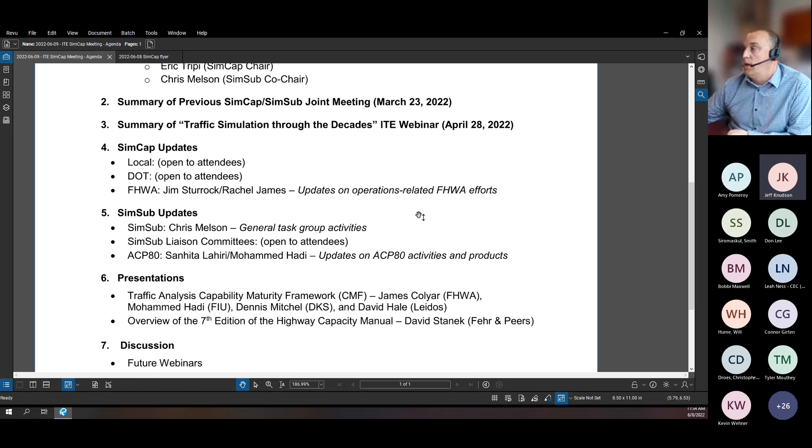So from a national SimCap meeting perspective, there is the meeting tomorrow from 2 to 3:30 Eastern time, so that would be 1 to 2:30 local time here in the central. Lots of good information on these national meetings. These SimCap meetings have been joint Sim Sub meetings, and lots of great information shared. Eric Tripi is the SimCap chair, and Chris Melson is the Sim Sub co-chair with John Shaw. Some of you may recognize that name, but FHWA has provided a lot of great updates on projects they've been working on, and there's been a lot of good presentations shared. So if you have the time and availability, there is a link here, a PDF and a Teams link, and I'll try to post that in the chat.

This is again tomorrow from 1 to 2:30 Central Time. The next meeting is planned to be in person as part of the annual ITE meeting in New Orleans. It's scheduled right now for 2 o'clock Central Time on Monday, August 1st, and they are going to look into seeing if they can make a call-in available for that, so more information to come. Any questions on the national stuff? Any other input that others may have?

Then I'll turn it to Rebecca for any DOT updates. Yeah, thanks Rob. I have two small updates. The first one is that the new Highway Capacity Manual came out earlier this year, so if you have any projects that you want to start using the new Highway Capacity Manual methodologies, you can. We'll accept those. You can continue to use the previous version through the end of the year, but if you have any projects that start after January 1st, 2023, we're going to require using the new Highway Capacity Manual methodologies. Now, I know there's always transition with projects, so the best advice is to contact your local region traffic engineer to make sure that's the right method you should be using. If you have any questions, you can always reach out to BTO and Vicki Haskell.

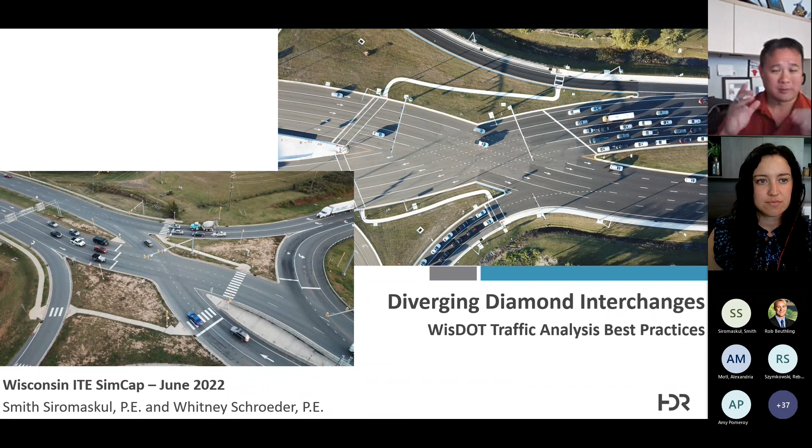We are going to talk specifically about VISSIM, primarily because that was what we were scoped to do, and that's how the document was written. But that also means that we're going to get into the weeds on some things. So if you have any questions, pound away on the chat window, I will get to them when I can.

Basically, what I want to start with is just my resume, or HDR's resume, in terms of DDIs. I have about 20 that I've worked on personally that are now open to traffic, and we've worked on them coast to coast. We've worked on them across the planet, actually.

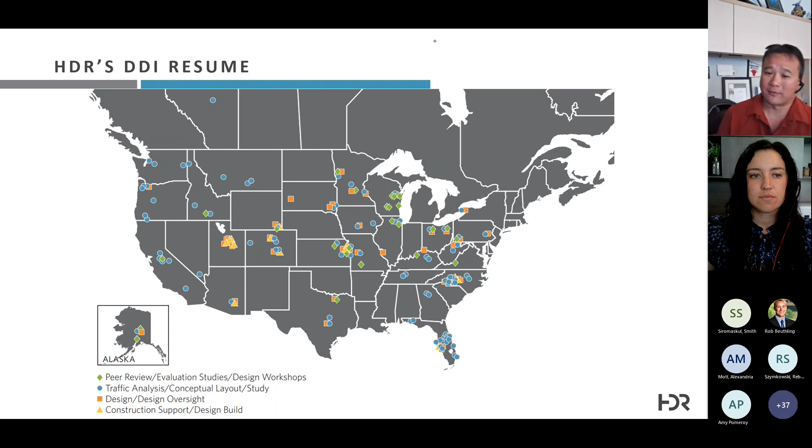A couple of the ones in Australia that are underway, under construction - one is open, one is about to break ground. But the gist of it is we've seen a lot of DDIs in a lot of different places, and we've done a lot of the different kinds of analysis that you'll see on diverging diamond interchanges in different contexts and different areas.

So this is what I want to talk about today. I want to talk briefly about software selection, about how to do a rough rule of thumb in terms of developing lane configurations, because it is pretty straightforward to look at a set of volume diagrams and just go, this is where I think I should start. And I'll walk you through a little bit of that.

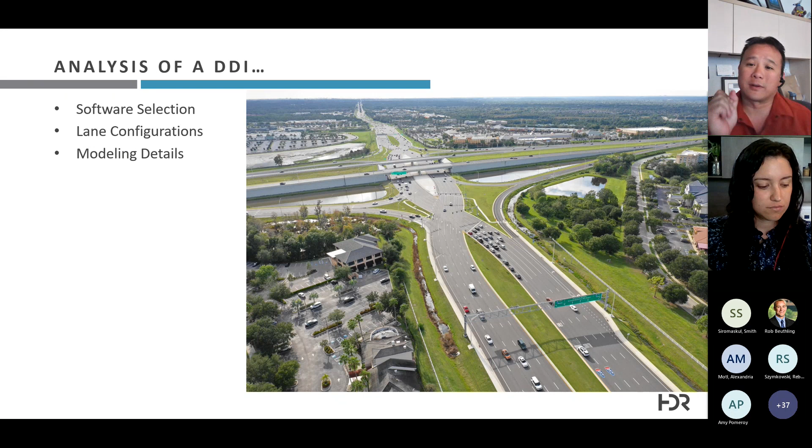And then we're going to get hardcore into modeling details. This will involve, you're going to need quite a bit of familiarity with some of the VISSIM details in order to get the most out of the back end of this presentation. So let's start with software.

In terms of HCM, HCS, it's yes, the DDI is included. No, you can't actually take a look at progression. No, you can't really look at cycles or developing signal timings. There are a whole host of things that make it somewhat impractical to really do a decent analysis of a DDI in HCM, to be completely honest. If you're finding one that is in the middle of an isolated space with nothing around it, that's one thing.

But take, for example, what you see on the screen right here. This is the I-25 DDI in Cheyenne, Wyoming, just south of I-80. It's a very small one, but the gist of it is, if you look at it, there's a lot of access points that are immediately adjacent to the interchange.

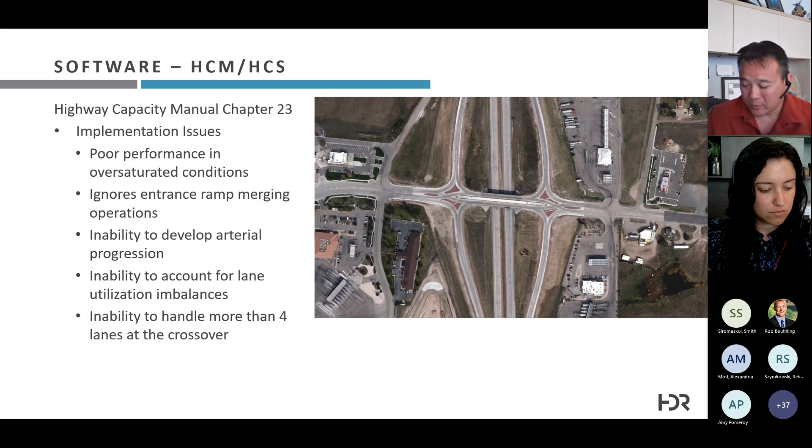With almost any DDI I can think of, there are going to be complications that make it such that even at a fatal flaw level, you really don't want to be relying on HCM in order to do your analysis. Now, I've seen a lot of analyses or studies that have used Synchro to justify looking at a DDI or considering a DDI. Here are a couple of major things that present issues for Synchro.

What you see on the screen is one of the first DDIs that we put in the state of North Carolina, I think. This is just north of Charlotte, in the town of Concord, North Carolina. There are two that we put in on this design build that are side by side, one at Poplar Tent Road, the other one at NC 73. This one that you see here on the screen used to have a full-blown three-legged intersection right here.

What you'll notice about this is we converted that into basically a three-legged R-cut. So it allows the left turn in, but everybody coming out of that road needs to go down to the west, U-turn, and come back around.

What this means, though, is that you have a whole bunch of different elements that require advance notice, so to speak. For example, if you're coming down this ramp, you're going to position yourself in a different place on that triple right turn, depending on whether or not you're trying to make this hook to go north or whether or not you're trying to go through.

In synchro, you don't have the ability to give vehicles brains. Basically, what you do in synchro carries over to sim traffic, but in both, the gist of it is a car only sees the next decision. That's it, whatever decision is in front of it. It has no ability to pre-plan for the decision after the one it's about to take.

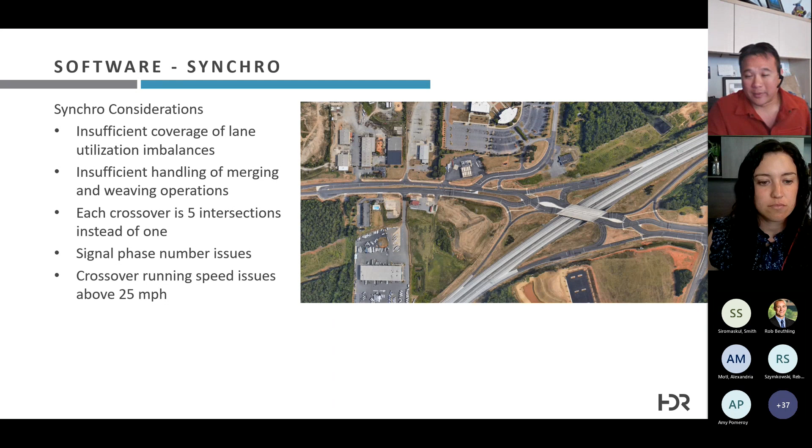Another issue is if this is in a corridor, synchro really doesn't like the fact that phases 2 and 6 cannot run together when you're in a DDI. What that means is you basically blow out your time-space diagram. It doesn't work terribly well.

And here's something that's buried in there. If you're planning on taking the synchro file and converting it into sim traffic, yes, you can code a DDI to sort of look like one, but at the end of the day, one of the two crossover maneuvers is treated as if it's a diagonal turn. Because it's not a through movement and it's treated as a diagonal turn, you can't put in a running speed higher than 25 miles per hour.

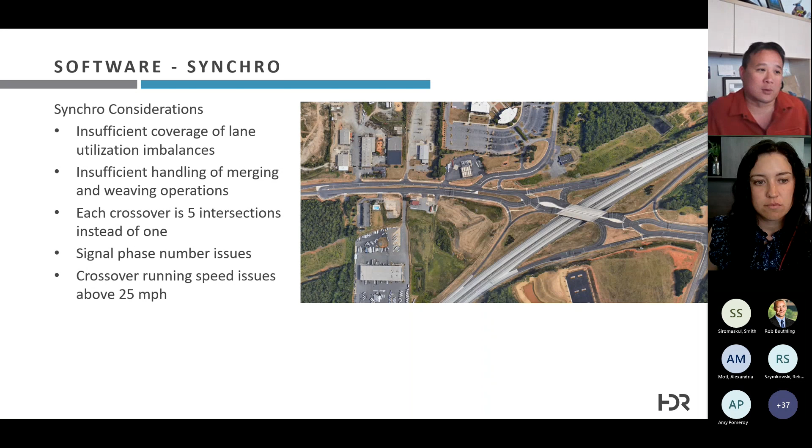That doesn't matter on an interchange like the one you see here, but on some of the larger ones we've worked on in Florida with crossover design speeds of 35 or 40 miles an hour, it can make a substantial difference. So if you're scoped to do synchro and that's all you really got, there are ways to trick synchro into doing a DDI plausibly well.

It involves putting into the synchro file something that looks like the right side, not the left side. Basically, your DDI is not going to remotely look like a DDI. But what you can do is trick synchro into giving you the analysis of the intersection itself and how well the signal works.

So what you're basically doing is, for example, movements A and C can run at the same time. So you group them in such a way that you create a split phase signal—groups A and C run together, B and D run together—and you translate that similarly over to the second phase of your signal.

The other thing to account for in a DDI is that your through movements aren't really turns, but they're not really throughs either, because they're going through reverse curvature. So the lower your design speed of that curvature, the lower you have to make your saturation flow rate. The default saturation flow rate in synchro is 1900. You want to adjust that down to 1650 if you're running at 25 miles an hour, or maybe as high as 1800, but you're not going to get your standard saturation flow rate through the intersection.

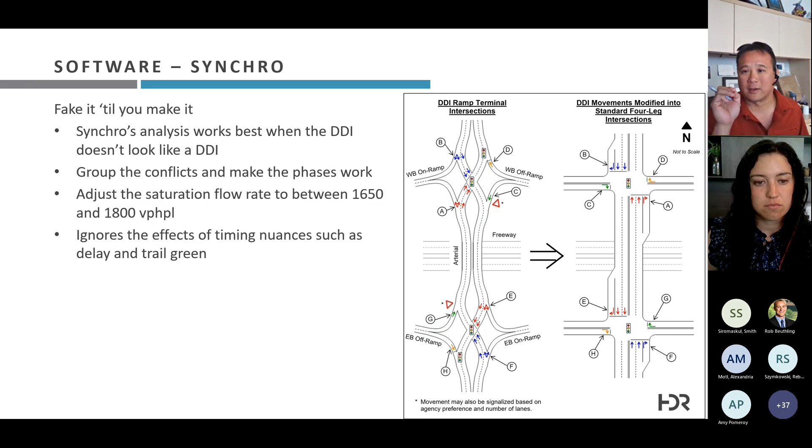The other thing to note is if you have a substantial difference in that distance or in this distance—I'll get into why this is important in a little bit—you really have to recognize that synchro can't really determine the effects of the nuances of delay and trail green. I'll get into what those mean in a little bit.

In terms of translation over to SimTraffic, you really need to look at simulation in order to account for how platooning and progression affect not just the DDI's ramp terminals, but the adjacent intersections up and downstream. It's important to determine how the DDI releases traffic into the rest of the network, and also to see how that traffic gets accepted from elements upstream that flow into you. And again, with sim traffic, you're still held to the fact that synchro only sees one movement at a time, therefore sim traffic only sees one movement at a time.

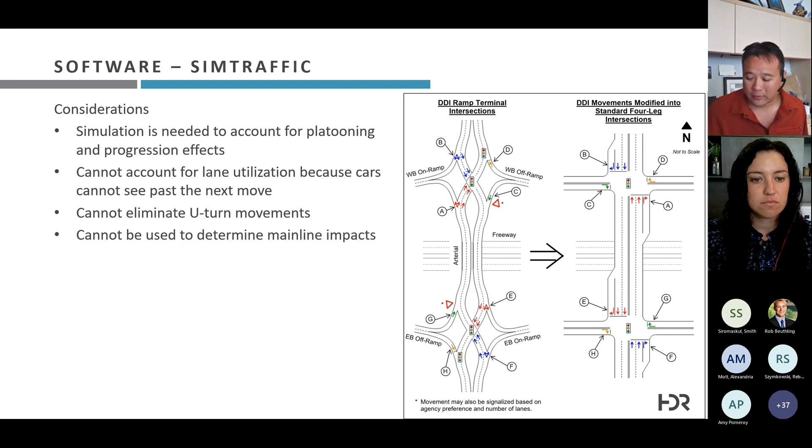And there's nothing you can really do to stop cars from making that movement or to make other movements that are somewhat illogical. And the other element of the equation is you can't really tell how a DDI versus a single point versus a partial cloverleaf versus a tight diamond, how those interchanges will impact how traffic flows onto the freeway. And there is a difference in how that actually makes that impact.

Now, in terms of lane configuration, and I'll get into the mainline impacts in a little bit, but in terms of lane configuration, really what you're looking at is the fact that from a signalization standpoint, the off-ramp left turn, you need to signalize that off-ramp left in a situation where you have more than one left turn. So if you have a dual left or a triple left, signalize it. The other reason to signalize an off-ramp left turn is if it goes into a trap lane, like what you see on the screen here.

The leftmost lane of the core going westbound through here becomes a trap to go southbound on I-25. This is the I-25 DDI at Fillmore Street in Colorado Springs. It's been open for almost 8 years at this point. So that is how to decide whether or not to make the call to signalize the left.

If you're going to put in an interchange like this, the other thing to think about is whether or not you signalize the off-ramp right. And in this case, the off-ramp right, you're going to want to signalize it for the same reasons. If you have a dual turn lane, you need to signalize it. If you've got a bunch of pedestrian traffic, you need to signalize it.

And the other thing is you want to bring them into a signal and avoid using a free flow right turn if there are any downstream access points that are immediately adjacent, such as the west end of this interchange. It basically flows out of the ramp terminal and immediately opens up into right turn bays and left turn bays. So in order to mitigate any potential safety issues, any concerns with how those open up and any kind of merging and weaving, you really ought to look at not doing a free flow right, even though that may be simpler.

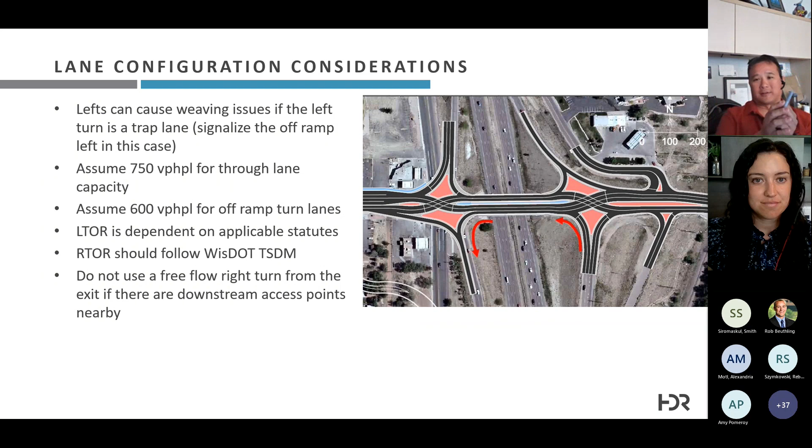Left turn on red strictly depends on the applicable statutes for the area, for the state, for the city, depending on where you're putting it. As far as right turn on red is concerned, basically the same thing. Follow the WisDOT guidelines that are already laid out in the TSDM. Now, I'm going to pass it over to Whitney for a little bit of a self-introduction before she gets into the nuts and bolts of VISSIM setup.

Hi, everyone. I'm Whitney Schroeder. I'm out of HDR's Minneapolis office, and I helped out on the VISSIM for I-41 in Wisconsin. So I'm going to start with getting into some of the setup components needed to build the VISSIM model. The two critical items that you'll start with are a reference file or background image, and then your extents.

The background image is extremely important. You'll want to base it on a CAD or MicroStation file and/or aerials. The distances between your ramps, your crossover locations, as well as any upstream or downstream intersections will be very important to ensure that the network is operating realistically and accurately.

Also, your extents: you want to make sure that your extents and your network stretch far enough to capture all the elements that you need. So this includes signalized intersections within 1,500 feet, unsignalized access points with volumes over 100 vehicles per hour that are within 1,000 feet, and additionally, anything that will affect your lane utilization and your progression.

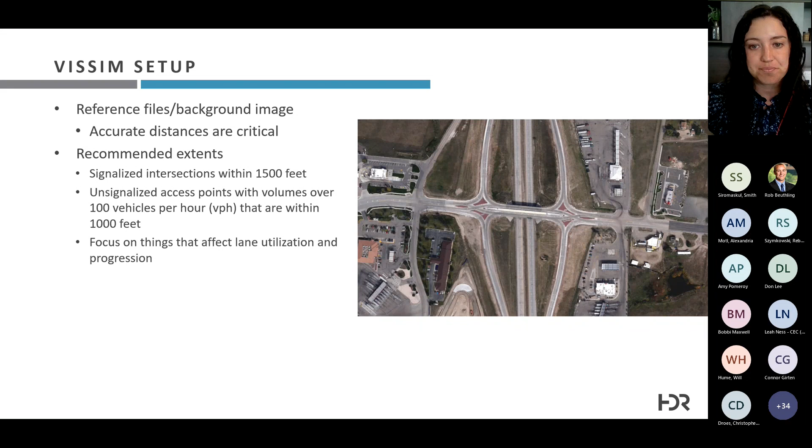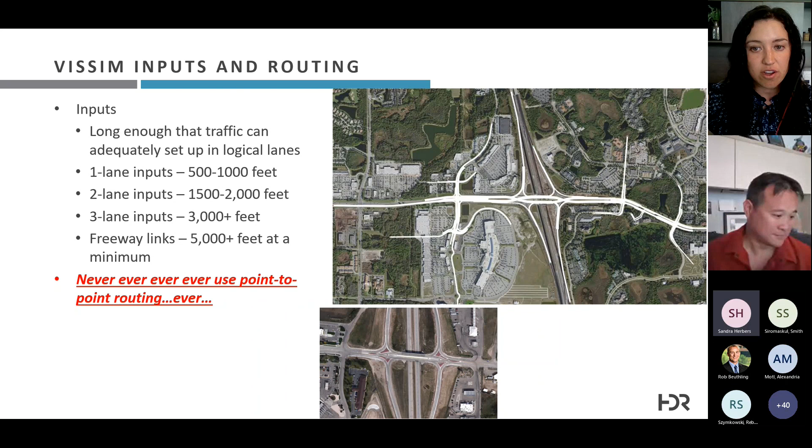So next, as we get into coding our links, we are going to take into account the length of those links. We want to make sure that they're long enough so that traffic can adequately set up in logical lanes. For one lane, you'll want inputs between 500 and 1,000 feet. For two-lane inputs, you want a little bit longer, up to 2,000 feet. And for three-lane inputs, 3,000 plus feet. Freeway links are obviously different. Those are quite a bit longer, usually 5,000 feet at a minimum.

One thing you want to make sure to avoid when you are establishing your routing is point-to-point routing. VISSIM provides several different vehicle routing types. Static routing is what's generally used, and that's done by either point-to-point routing or origin-destination routing. The difference is that point-to-point routing is when vehicles encounter multiple decision points through the model, whereas OD routing would be when vehicles know where they want to go from start to finish.

The reason we want to avoid point-to-point routing is that the more decision points you add to the network, the more problems you can run into with vehicles not having enough time or space to change lanes at intersections, for example. So some point-to-point routing is okay, like mainline to interchange routing, but point-to-point along an arterial can be very problematic for vehicles getting stuck.

Absolutely. And the other thing to think about is point-to-point routing, for example, on the intersection to the south, maybe not that big a deal because everything's single lane. So people really can't set up in the wrong lane per se. But on the VISSIM model that you see to the upper right, that is the I-75 at University Parkway VISSIM model. And all the turns there, the right and left turns off the ramps, are triple turns.

It goes onto an arterial that's 4 lanes in each direction. The turn bays at the adjacent intersections are triples. Lane utilization is absolutely critical to get right for that. So yes, never, ever use point-to-point routing when you're dealing with decision elements that are that close together.

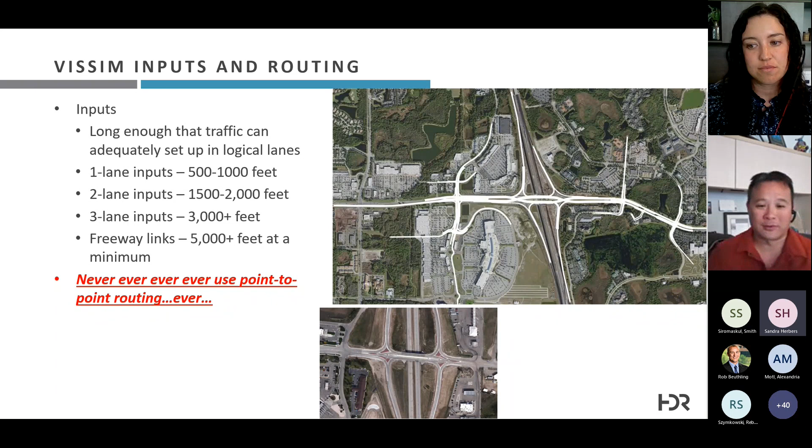The next inputs will be setting emergency stop distances, look back distances, and calibration. So you want to make sure you don't use the defaults that the software provides. The reason for that is that oftentimes they're too short, and that results in unrealistic behavior. It doesn't give the vehicles enough time and space. So these are the recommended distances that should be entered. And then it's kind of an iterative process, so you'll have to calibrate and adjust as needed.

Okay, what you see on the right side of the screen is the Oneida DDI built up there in the Northeast region. And one of the things that Whitney is talking about is the fact that coming off of this right turn right here, it basically opens up immediately into a left turn bay just south of the interchange. You need to make sure that people in the model are lining up to where they need to be, because the software defaults are unrealistically short and they'll lead to some really unusual lane change behavior.

One of the things that you really want to look at when you're adjusting emergency stop and lane change: when you run your VISSIM model, take a look at the error file. Look for any of the vehicle dissipation errors that involve vehicles waiting to do a lane change that are unable to make a lane change, and they get removed from the model. So done right, if you set up your e-stop and your lane change distances properly, your error file should be pretty much void of any of those vehicle dissipation errors.

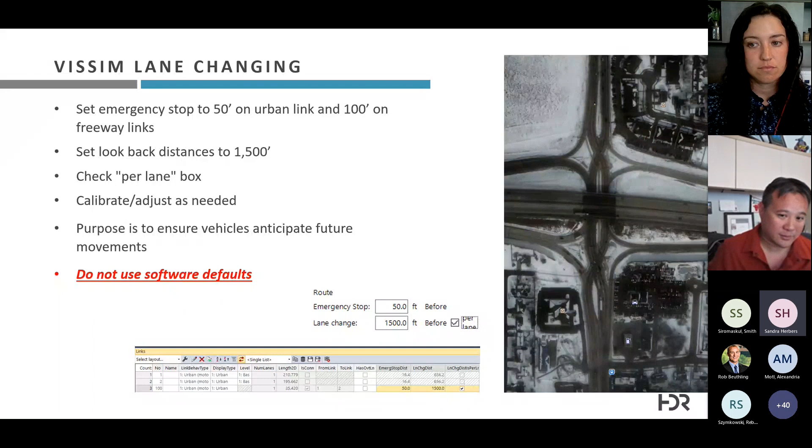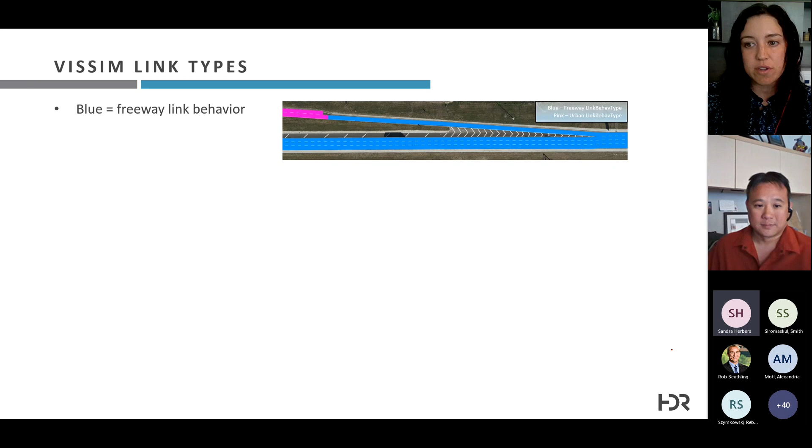So in establishing the VISSIM link types, it's important to code links as the correct behavior type because that determines how those vehicles will interact within that given link. So for the display type that you see here, the blue and the pink, you also want to stay consistent. Consistency is helpful because it allows you to easily spot any discrepancies, and it also makes it easier to track where link behavior types have changed throughout the network.

Interchanges are generally coded as urban rather than freeway, and that's because cars are slowing down to the speed of the arterial, and they're making more decisions than on the freeway.

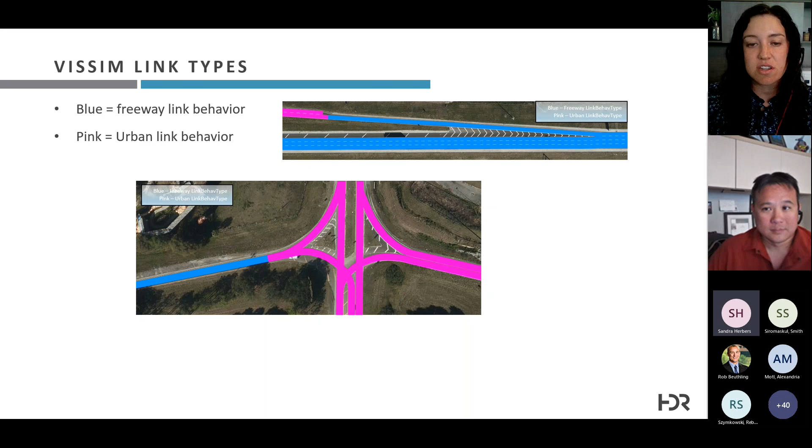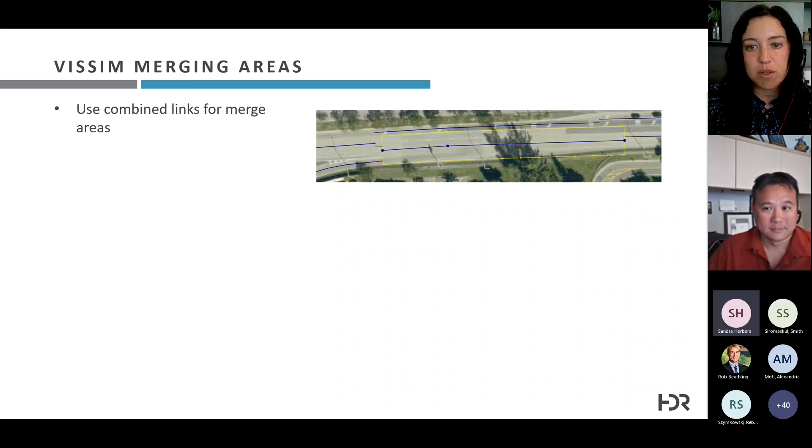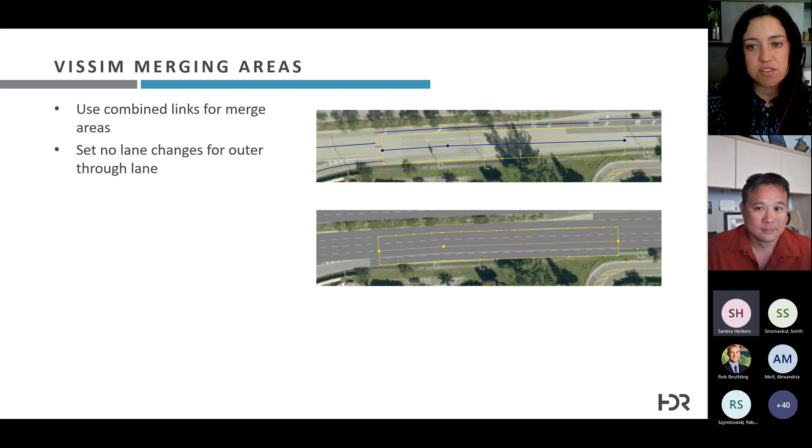In areas where you have merging, you want to use combined links, and the reasoning for that is because it recognizes how people actually drive throughout that merge area. And with that in mind, you also want to set the no lane change for the outer through lane. And that's because it doesn't really make sense for cars to change lanes into the merge when it's about to end.

So in areas where you have merging or crossing conflicts, those should be coded with connectors. Crossing conflicts are coded as connectors because connectors are where decisions are made. This is where you use lane change distance and look back distance so that cars can know where they need to be. This allows conflict areas to be made simpler.

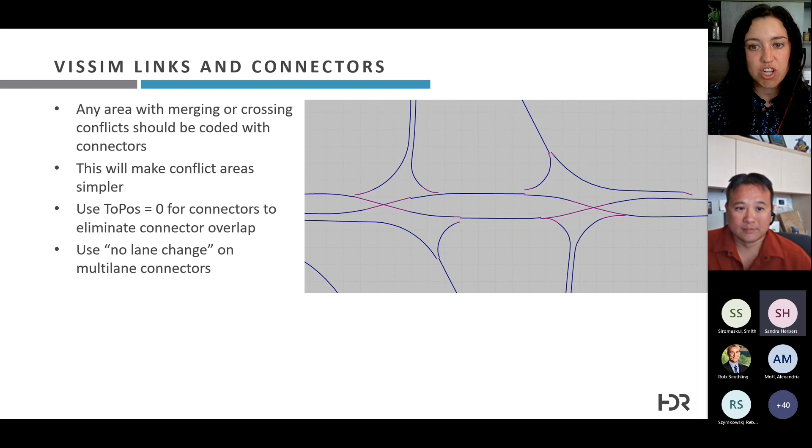Where you have connectors and links, you also want to set the to position as 0 for your connector. This is so that it doesn't create unnecessary conflicts and it keeps all conflicts within the intersection. We want to set the to position to 0 because if we didn't, that would create additional conflicts and vehicles will run into each other in that area. We set no lane change on multi-lane connectors, and that's to prevent drivers from changing lanes within the intersection.

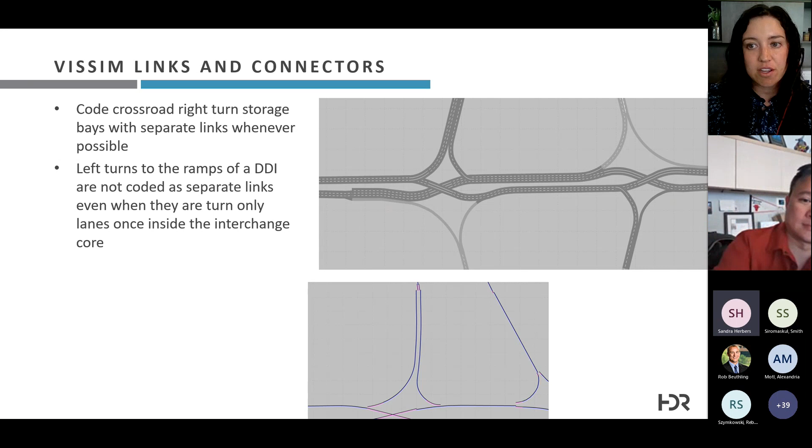So when you're coding turn lanes, generally a crossroad right turn storage bay is coded with a separate link. This is usually consistent with a traditional intersection as well for left turns, but for a DDI, your left turn to the ramp is not coded as a separate link. The reasoning for that is because the DDI left turn operates as a shared through left. The dedicated left through lane can't be coded as a separate left turn bay because VISSIM can't really handle that. For ramps and turns, you code the left and right as separate links as far as possible upstream based on the geometry.

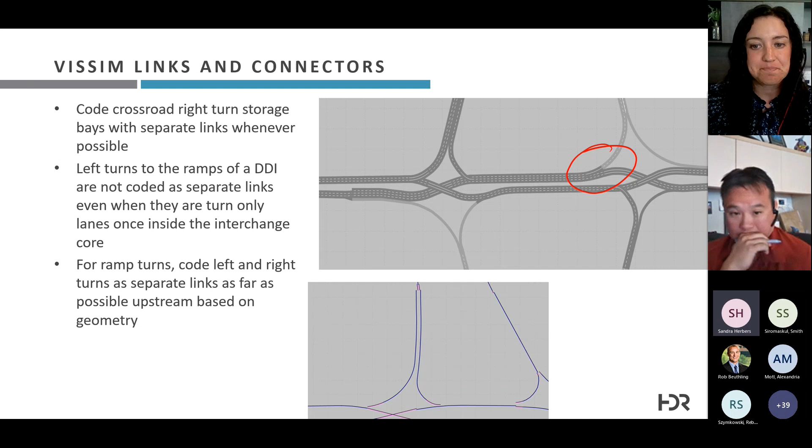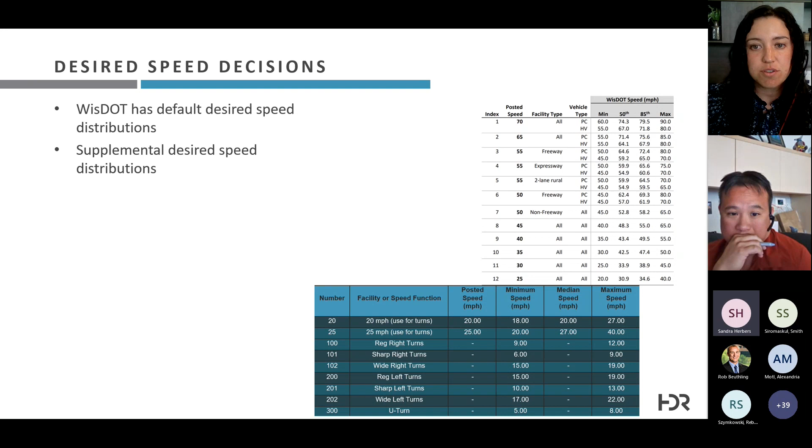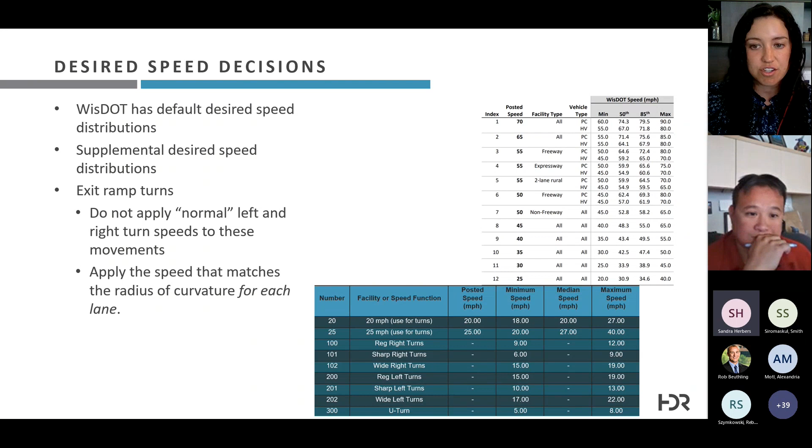So when you're establishing your speed decisions, Wisconsin DOT does have a default desired speed distribution list provided on the right, as shown in that white table. But we also use best practice supplemental desired speed distributions. We have all these different options for a reason, and we generally base these on the radius. Each lane should have a different speed decision because it has different geometric characteristics. And likewise, different vehicle classifications should have different speed distributions as well.

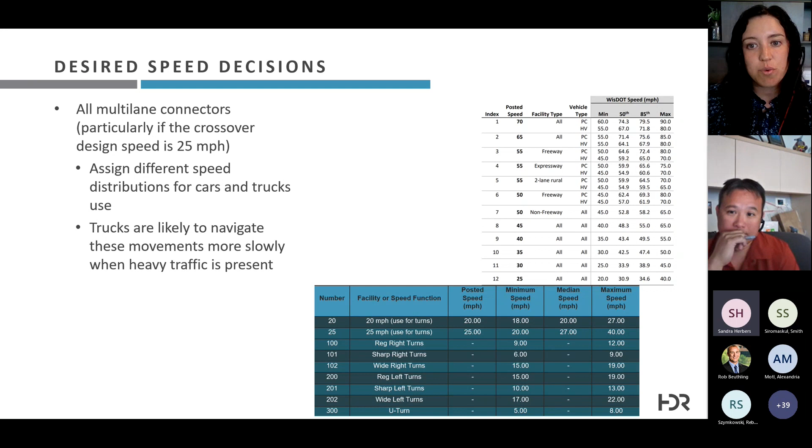All multi-lane connectors, particularly if the crossover design speed is 25 miles per hour, we assign different speed distributions for cars and trucks because they behave differently. For example, if you have a dual left, a smaller vehicle on the inside lane is going to turn and operate at a different speed than a truck that might be on the outside lane.

So placing the desired speed distribution. When we have a curve, we place the DSD and the RSAs on top of each other just prior to the apex of the first curve encountered. Smith will actually give a good example of this on the next slide. And if the spacing between the terminals is greater than 750 feet, then vehicles tend to speed up within the core. And so this is another instance why it's really important that you're using an accurate background image so that you can demonstrate this correctly.

And this is generally when there's a significant speed difference that takes place. People generally want to slow down for the curve, but we want to make sure that they don't speed up on the exit of the curve. So that's where it's really important to set the RSA and the DSD in the correct locations.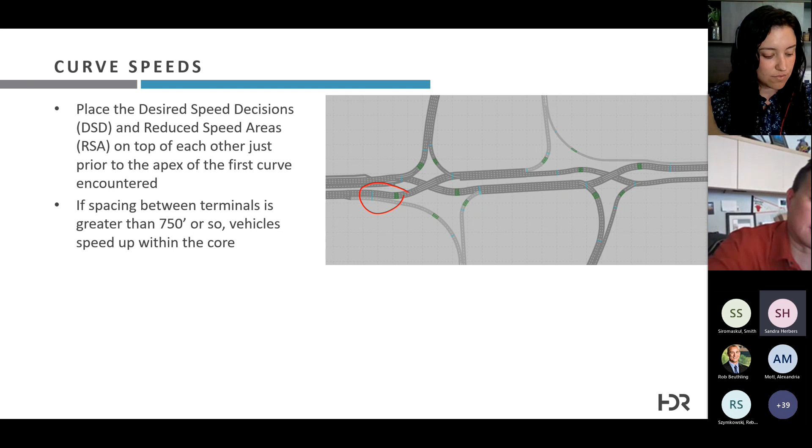And of course, Whitney brings that up, and I have a graphic on the screen that shows that very thing. What you see on the screen is a DDI that has a 35-mile-an-hour design speed. The posted speed on the approach is 40. So the speed differential between the approach and the core is only 5 miles per hour. So in this case, we do have the DSDs and the RSAs a little bit separated. I'll show you right now an example where they're actually combined. So you can see here that the DSDs and the RSAs are exactly on top of each other.

And that's important to recognize, the reason we did that is because traffic coming off the freeway is coming down at 70 miles an hour. And as they break off, we have them coded at 60 from way upstream, knowing full well that once they get into these curves down here in the core of the interchange, as they approach the turns, that speed differential is somewhere around 25 to 30 miles per hour. Those curves that you see on the screen are designed between 25 and 30, and that is a significant slowdown.

A vehicle in VISSIM can anticipate a reduced speed area. They cannot anticipate a DSD, a desired speed decision. So a desired speed decision is one of those points where basically once a car has passed it, it now knows that it wants to go this speed. So if you had a DSD by itself, like right here, a vehicle hits that point and it will start to slow down to what speed you're telling it.

An RSA is something that it can anticipate. So a vehicle will slow down for this, and the moment it clears that, it can speed back up. So that is much more of a viable treatment when you have a speed differential that isn't that great. So for example, this guy's moving 35 here, and he may be moving 25 here. But at the same time, a vehicle will slow, hit the apex, and then start to accelerate out.

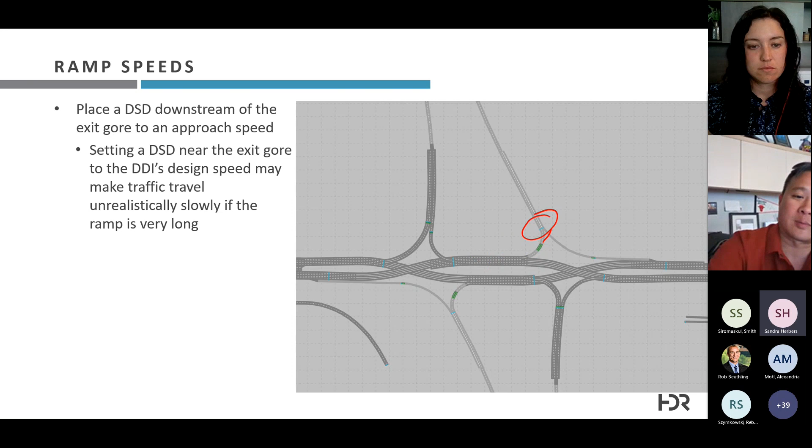And by the time you get to this point, we've actually put in the ramp DSD, which will get it up to 60. So when you have something like this, and they're co-located, the RSA and the DSD, when a vehicle hits that DSD, it will slow its desired to 25, but the RSA being directly on top of that means that it's anticipating that I'm going to be decelerating down to that point prior to getting there.

So that basically allows you to maintain that curvature speed all the way through a long sweeping curve. This is also something that you want to do when you're looking at a traditional loop ramp at a partial cloverleaf. So while this is mainly focused on DDI best practices, this is something that applies across the board.

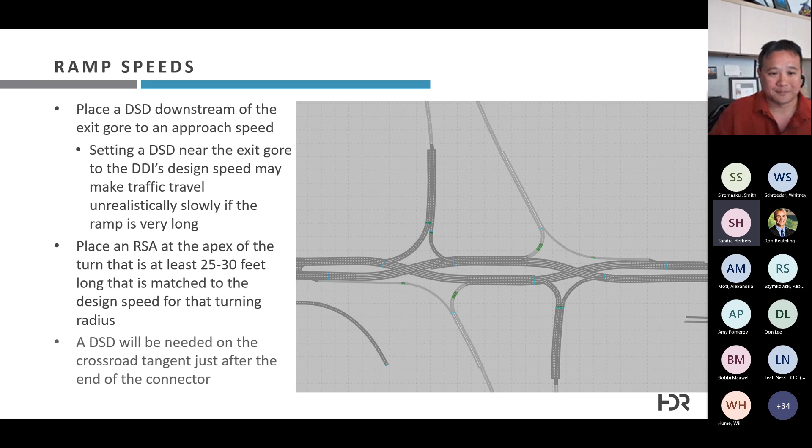All right, now then, let's get to ramp speeds. For traffic turning onto the entrance ramps, basically what we do there, and I covered this on the previous slide, is put an RSA at the apex, make it as long as you need to kind of force that traffic to stay realistic, meaning they slow down as they approach the apex, they go through the curvature, and as soon as they can really spot the tangent, that's when they start to speed up.

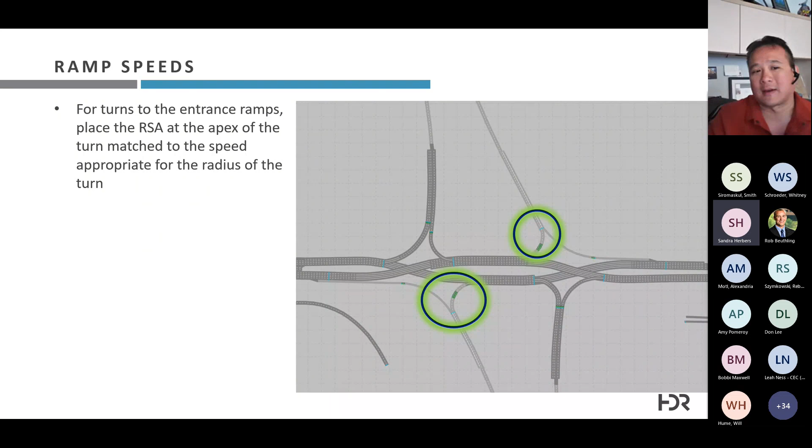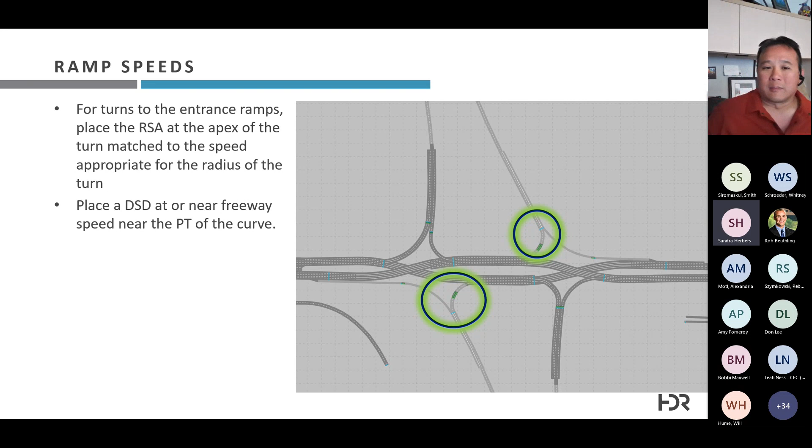They don't necessarily wait for the tangent to speed up. They just need to be past the apex to speed up. And that's how you should drape your RSAs around the apex of that curve. On the exit side of that curve, make sure that they start at that point to accelerate up towards free flow speed, so it more closely mirrors exactly how people drive it in the field.

Now, this is where we're really going to go down a rabbit hole. Signal timing. Basically, there are two schools of thought. If you go with a shorter cycle length, less queuing per cycle, but you may end up having issues coordinating that shorter cycle length with what's up and down the arterial, if those arterial intersections are typical intersections. Of course, this doesn't necessarily hold if you change your adjacent signals to something that's two-phase, like an R-cut or a CFI or something along those lines.

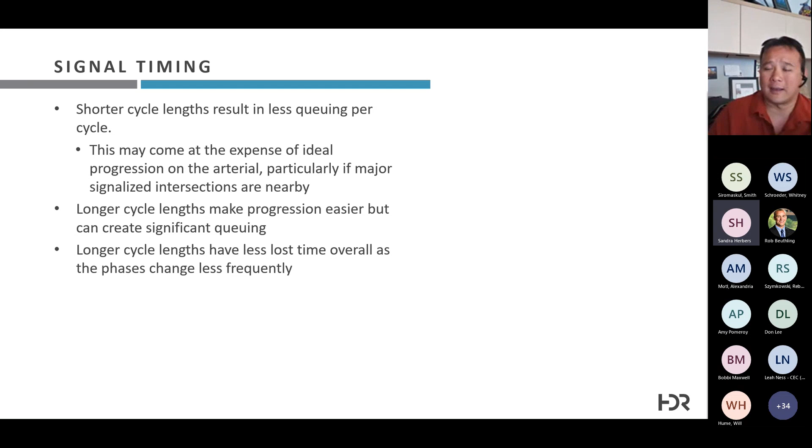If you're looking at longer cycle lengths, progression is a lot easier, but man, you really start to stack up traffic in the core and on the approaches with fairly significant queuing if you go with a longer cycle length. And one of the longer cycle lengths I've seen at a DDI is running about 180 or 210 seconds, depending on the time of day.

Now, in terms of signal timing specific to VISSIM, make sure you set your frequency to 10 because you really want that signal to be looking every 10th of a second. Use multiple RBCs. Even if you're not going to put multiple controllers in the field, when you're developing your signal timing in VISSIM, it's a lot easier to deal with it when they're two separate RBCs.

Now, the other thing is, when you have two separate RBCs and two separate controllers in the field, think about how you're going to operate this interchange in the middle of the night. When you're running on two separate controllers, you have the ability to rest these two movements on green. Because the only reason this movement would ever need to be green, the one coming out of the core, is if somebody has come into the core.

So in the middle of the night, you want to rest on these two greens, and you want advanced detection in the core of the interchange in order to really reflect, okay, a car has just entered the core. Now he's just entered the core here. He's tripped that detector. Now, because there are no calls on this side, because it's the middle of the night, I can flip that signal around and provide the green in the other direction.

So it's very helpful to have advanced detection specifically for off-peak operations, which is something that we don't necessarily think about all the time. Another thing to consider, and this is true at this interchange here in Cheyenne, is you don't have to connect the signals together necessarily. If you look at this interchange, this is I-25 at College Drive. Just go find I-25 and I-80 in Cheyenne, Wyoming. Go two interchanges to the south and you'll find this.

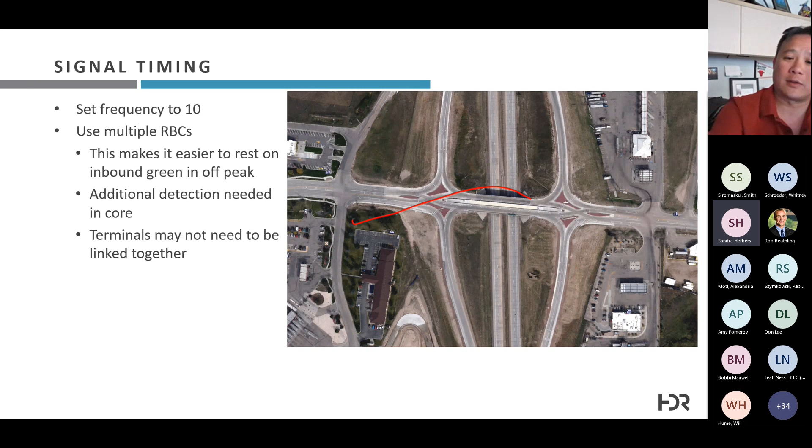So there's really no need to coordinate traffic as it goes all the way through the interchange. So what we've done is we've actually left both of the terminals running fully actuated, running free. They're not connected. They're not coordinated because they don't need to be. A vehicle basically that travels here, it doesn't hit that second signal. And a majority of the movements that are coming through this interchange are basically using the interchange to go north and south.

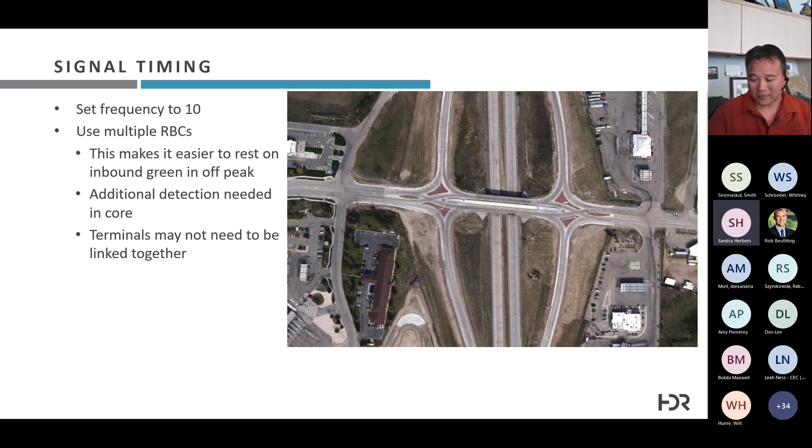So on this next slide, I want to be very clear about any issues that I'm talking about here. These are on interchanges that I've personally worked on. So the only person getting thrown under the bus is me. So this is how not to do a DDI signal timing.

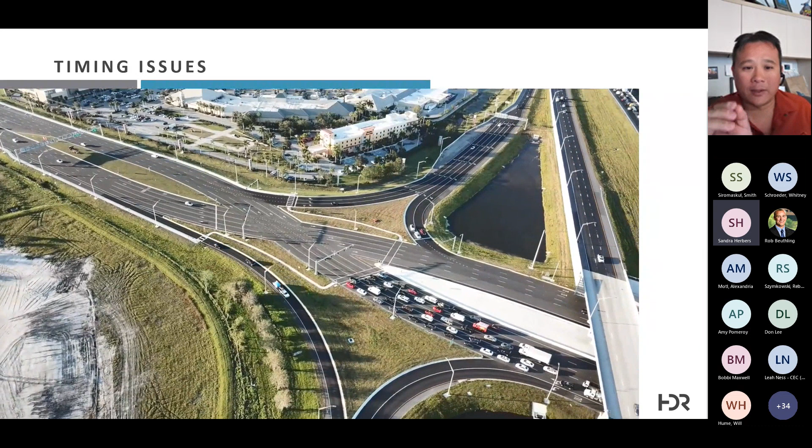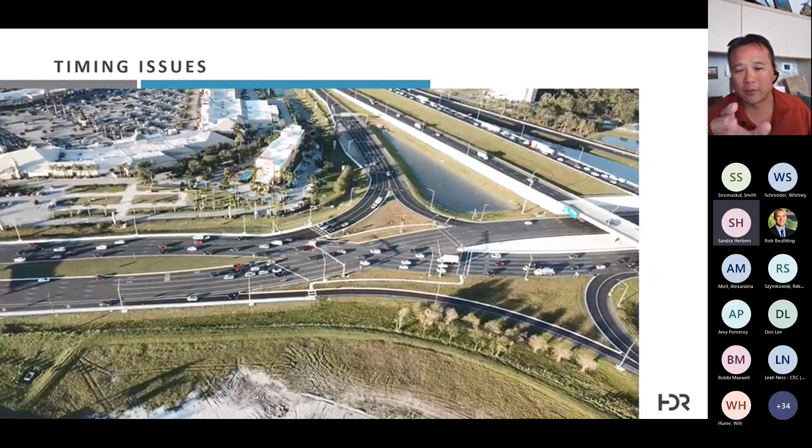What you see here, north is up. Right now, the eastbound direction is about to get its red. The westbound through and the southbound left at this signal are about to get green at the same time. That should never happen. What should happen is that the westbound through should get released before the southbound left gets released. And I'll talk about why in a couple of slides. But that creates an additional lost time for the westbound through on the order of about 5 to 10 seconds because of the way that this is laid out.

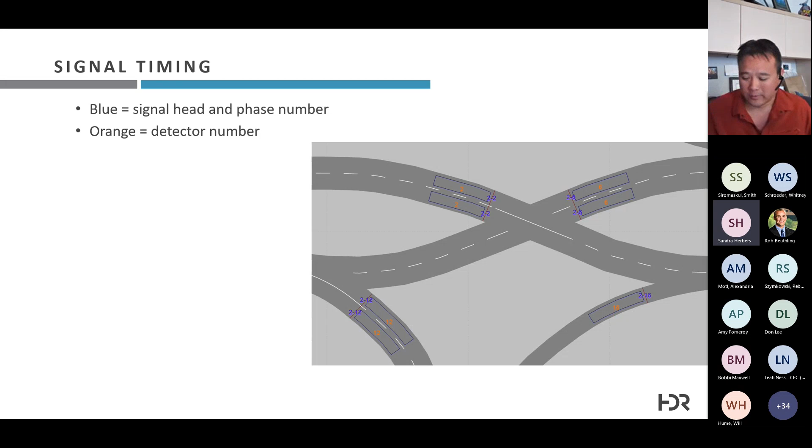Now, when you put this in VisSim, what you need to do in order to do this right is, what you see in blue are the signal heads and the phase numbers. And you'll notice that this is signal 2, this is phase 2, and this is phase 12. Phase 2 is the parent. Phase 12 is the overlap of phase 2. Similarly, this is 6 and this is 16. The reason that we do the off-ramp turns as overlap phases is to allow us to do this.

And we're talking specifically about phase 6 at this point. When you do phase 6, the yellow is based, of course, on the running speed of the approach. But the yellow and all red is designed to get you across this initial conflict point. That's all fine and good. What you just saw in the previous example at University is the yellow and all red was extended to get you past that conflict point. And there is absolutely no need to do that. The reason that we did it on that particular interchange had to do with a shortcoming of the controller software. The controller software that we were using out there simply could not handle delay and trail green.

Now, when you do this in VisSim, you will want to put a delay and a trail green here. What this means is you're delaying the start of green behind this guy. So if the delay is, say, 5 seconds, that means you're allowing phase 2 to run for 5 seconds before phase 12 releases. It might not be 5 seconds. Really, what you're worried about is this distance here. What trail green means is basically that you want phase 2 to end, but you want phase 12 to go a little bit longer because it doesn't need to end at the same time that 2 does, just because of the nature of where the conflicts are.

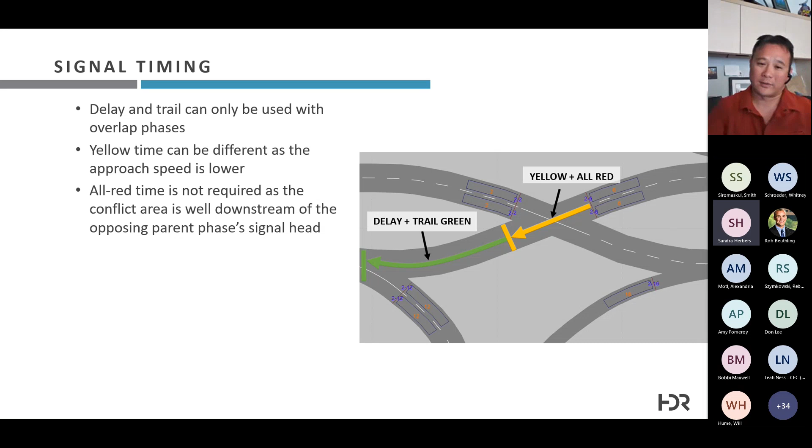The yellow time for phase 12 can be different if you're comfortable doing so because the approach speed may be different. So how you judge those two yellows, they don't need to be identical. The all red time you can ignore for phase 12 because the conflict is well downstream of the parent phase's signal head, and you're kind of emulating that all red anyway.

Now here's the catch. When you're doing this in VisSim, and you won't find this in any guidebook, this is discovered via straight up trial and error. Delay green has no impact. You can delay something for as long as you want. The trail green, however, the trail green value cannot exceed the parent phase's yellow plus all red. If you do, VisSim will not throw an error. It won't give you a warning. It won't tell you that anything has gone wrong.

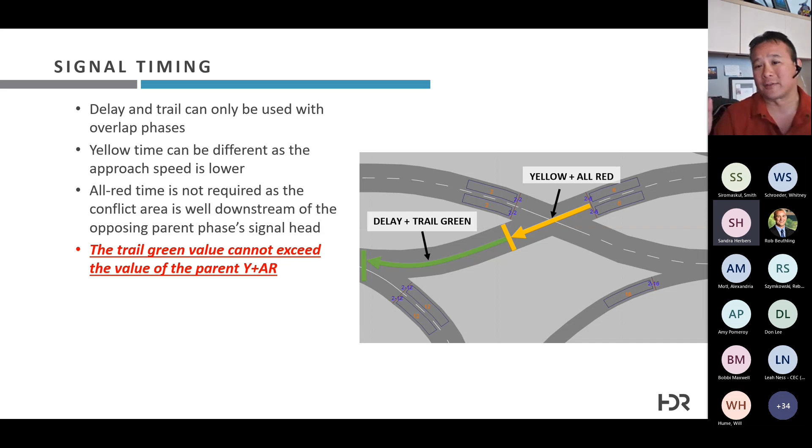But when you look at the animation, you'll see very clearly that the delay and trail green simply isn't working right. So it will just turn around and say, all right, what you gave me doesn't make sense. I'm not going to give you a heads up. I'm just not going to work. And it actually throws the entire signal off of cycle and out of coordination. It's really unusual, highly annoying, and I wish they would fix it, but they haven't.

Now, in terms of stop bars, this is going to be very much site-specific, very much state-specific, and very much based on what you've decided to do in terms of control for right turn on red. Now, in a lot of states that have multiple DDIs in place, they will allow a right turn on red from the outermost right turn lane. So the one on the far right.

But they won't allow a dual or a triple right turn on red from either the center or the left lane. So when you're coding it in VisSim, make sure you've done that correctly and put a stop sign on lane 1 and a signal head on lanes 2 and 3, for example.

The other thing you have to deal with when you allow right turn on red is making sure you've adjusted the headway and gap acceptance to account for the fact that conflicting traffic is traveling in a way that's sort of atypical. You want to leave a larger than normal headway and gap acceptance because drivers are a little more hesitant about turning right on red at a DDI than at a regular intersection.

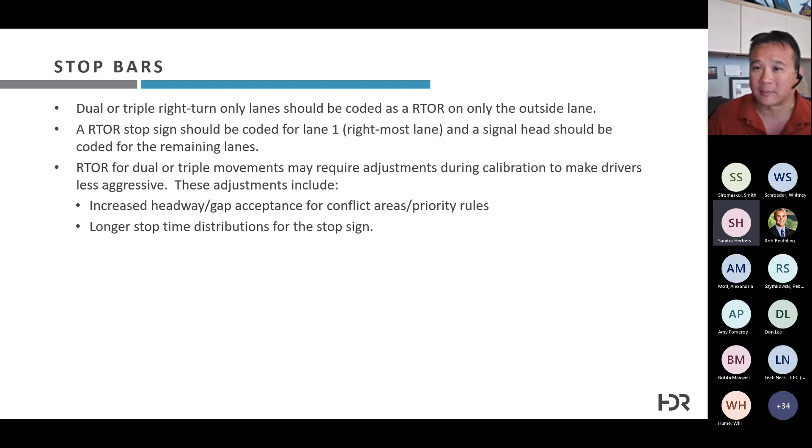That's also what factors into the longer stop time distribution for that stop sign, and that's only really applicable on VisSim 21 and onward.

So, almost down to the end here. Measures of effectiveness. Now, there are a number of things you need to consider when thinking about what measures to pull out of a VISSIM model.

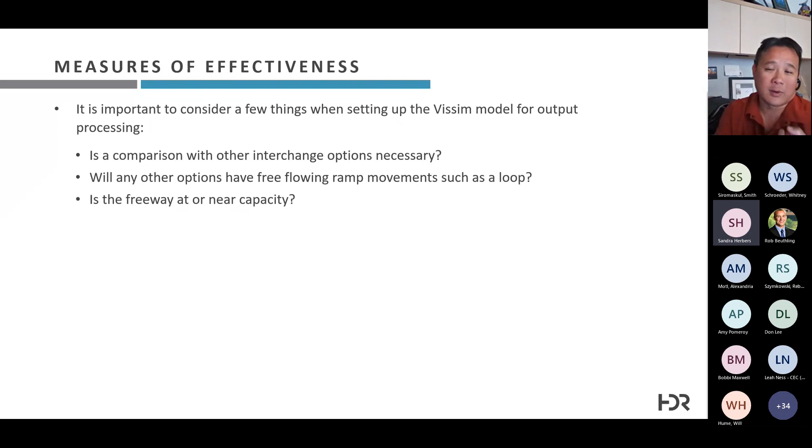And what are you comparing it to? What are the characteristics of the other interchange you're comparing it to, i.e. free flow movements? That last one's a little unusual and may seem somewhat counterintuitive - it has to do with whether or not the freeway is at or near capacity.

So let's hit those questions one at a time. If you're comparing it to other interchanges, particularly say a DDI to a single point, you're talking about an interchange that has two signals versus an intersection that has one.

Either that, or if you're doing a partial cloverleaf, for example, where you have a cloverleaf with a loop ramp in the northwest quadrant, the southbound to east, westbound to southbound movement has to go through a loop, but through one signal, versus a diamond where it goes through two, or a DDI where it goes through one, or a single point where it goes through one.

Depending on how you want to work that out, you really want to take a look at the entire interchange's operations, not necessarily level of service, but to at least look at delay.

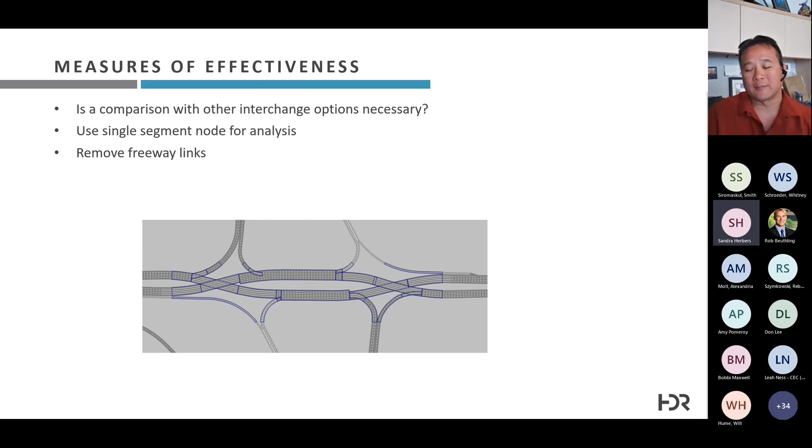So what you see on the screen is not the polygonal node, but the segment node type that you can use in VISSIM. Notice that when you do the segment node, you're able to remove freeway links from it. This allows you to more directly compare one interchange type versus another, because you're looking at the whole thing as one continuous unit, not just in pieces - not just the west terminal or the east terminal.

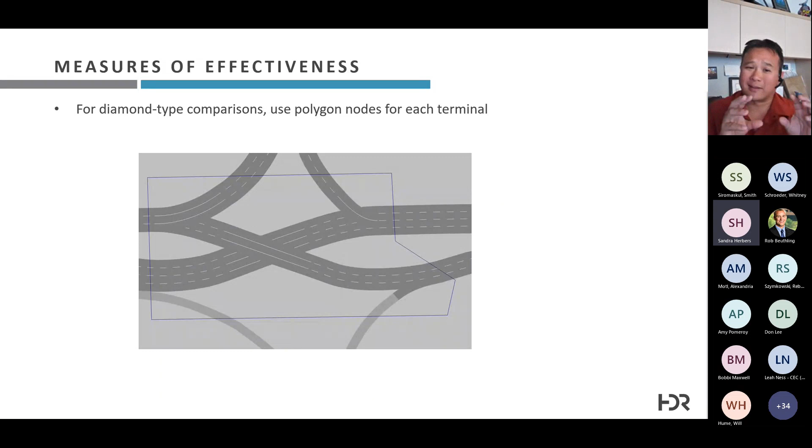If you are comparing a DDI to just a standard diamond or something else that has two distinct separate terminals with the same movements running through them, go ahead and use a simple polygonal node. Just realize that in doing so you're really hamstringing what you're able to review and compare. You don't want to use polygonal nodes if you're going with a single point as your other option.

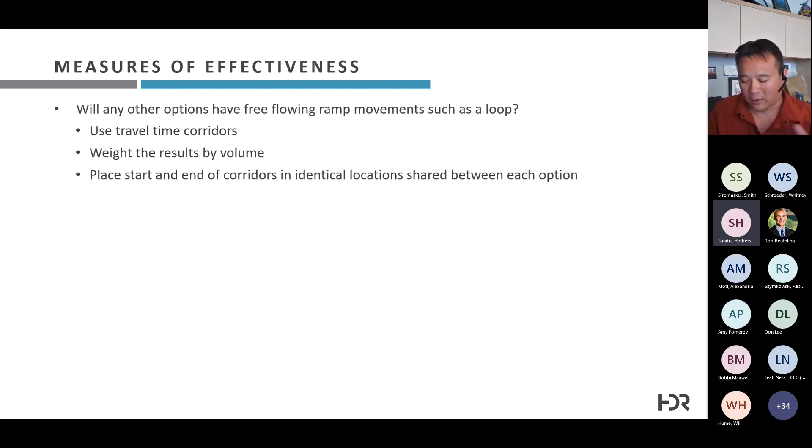Now, if you have anything that involves a free flow movement, or at least a partially free flow movement - like we talked about earlier, if you have a partial cloverleaf where that free flow movement still has to go through one signal - what you want to do is use travel time corridors, and make sure that when you're doing your travel time corridors you've chosen geographically identical locations for your start and end point, something shared between all the different options you're putting on the table, because that's the only way to get a fair comparison.

Now, here's the part that's a little counterintuitive: when the freeway is at or near capacity, the interchange makes a difference.

Now, before we get on to how to do this - think about the amount of green time that a left turn to a freeway gets at a standard diamond. They have to go through one signal as a through movement, get to the second signal, and then turn. The amount of green time that movement actually gets is somewhere around 25%.

If you think about how a left turn to the entrance ramp is handled at a single point, it's the three-phase signal.

They get a little bit more green time, but it's usually around 35, maybe 40% if it's really heavy. If you think about how much green time a DDI gets for that left turn, it's usually around 50 to 60%. At the end of the day, what that means is the same amount of volume is going down the ramp, but the density of the traffic as it's delivered to the main line is completely different.

The DDI's delivery is a lot less dense because it has more green time to service that same demand. So if your freeway is at or near capacity, the amount of traffic that gets released as part of a standard diamond, for example, it'll hit in a much denser slug of traffic. You're going to want to turn on link evaluation for the links before, during, and after the ramp merge to really show the difference in that impact on freeway flow.

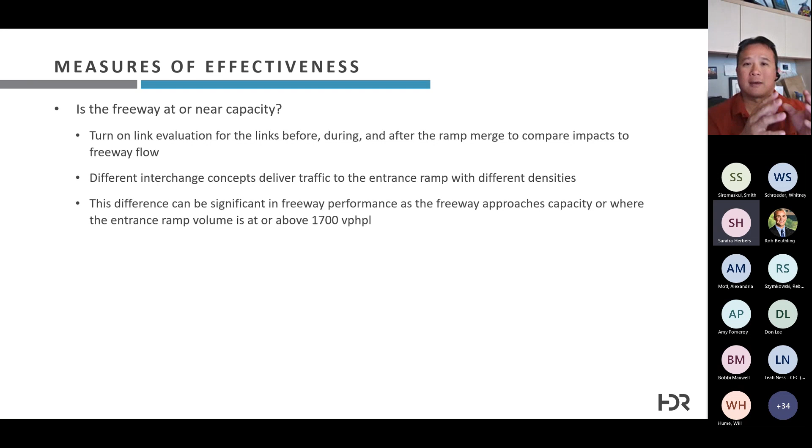On the other hand, if you have a ramp, for example, that's dropping so much volume down that you're running 1600, 1700, 1800 vehicles per hour per lane on the ramp, you're still going to want to look at what kind of impact that's really delivering to the freeway. So two different things to look at: Is the freeway at or near capacity, or are you maxing out the physical capacity of your entrance ramp? If either of those two cases are true, do not neglect how your interchange selection is impacting your freeway operations.

Now, the reason we've been talking specifically about using Vissim for DDI analysis - even if you are looking at a DDI from a proof of concept level type of analysis, you're really still going to want to go into microsimulation to do it.

Now, when you're doing microsimulation, the thought is, oh my God, it's so expensive. But really, the expense comes in the data collection for calibration. And if you're doing design level analysis, yes, you should calibrate. But if you don't have the data to calibrate, or if you're just doing it at a proof of concept level, doing a microsimulation is still better than trying to run this in Synchro or run it in HCM.

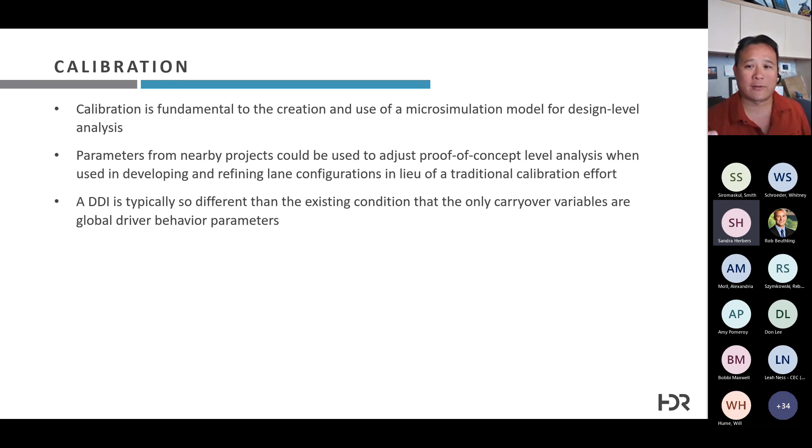And if you think about calibration, typically speaking, a DDI is so different than what you're putting into the ground, than what exists right now, that the only things that'll carry over are driver behavior parameters. Things like emergency stop, lane change, how quickly people react to signals - so startup loss time and headway, their desired speed, all those global parameters will carry over.

So in lieu of having actual field data at your site, one of the other things you can look at is simply look at another roadway that's in the same area, that's in the same roadway or land use context, and use some of those driver behavior parameters for your fatal flaw analysis. That's also perfectly fine. At the end of the day, it will be a better use of your time to look at this in simulation than looking at it from a deterministic analysis such as Synchro or HCM.

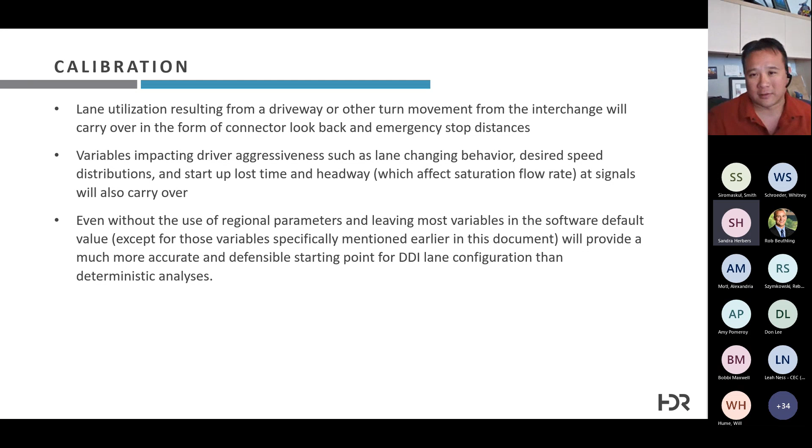So on that note, I'm going to leave you with a pretty picture and a pretty movie to look at and see if anybody has questions. If not, thanks for your time.

I think we've got one in the chat. It looks like it says: when the adjacent intersection is metering the input volume into the DDI and there are no plans to improve or modify the intersection configuration, what's the best practice to ensure the DDI can actually process that demand, those volumes? The first half of that question is actually complicated.

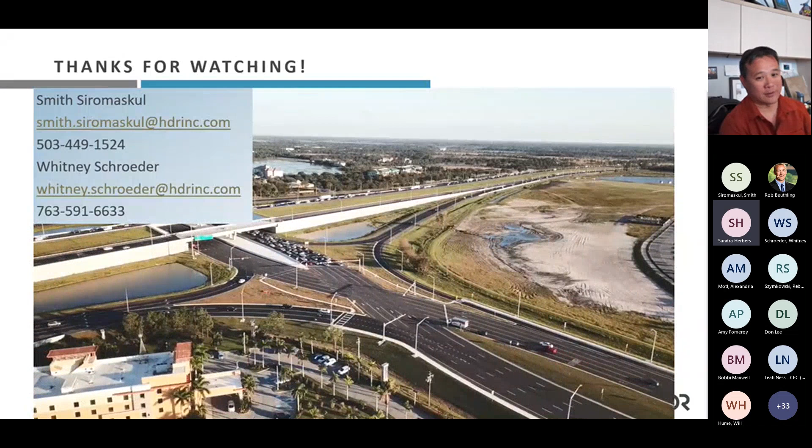What happens if you have a meter? Because if you have an adjacent failing intersection that's metering traffic coming in, the problem is it's actually going to meter traffic going out as well in all likelihood. So that is something that you really got to look at from a systemic basis.

From a best practice, the second half of that question is how can you ensure that your DDI is going to be able to meet the demand volume? Well, the simple fact is you really need to look at your DDI and use the actual demand volume that's trying to come in, because you have no guarantee that that meter will always be there. And if the meter is somehow released for whatever reason, that they finally find unexpected funding to make that change, to make that improvement, you don't want to have built the DDI that was relying on that meter to function.

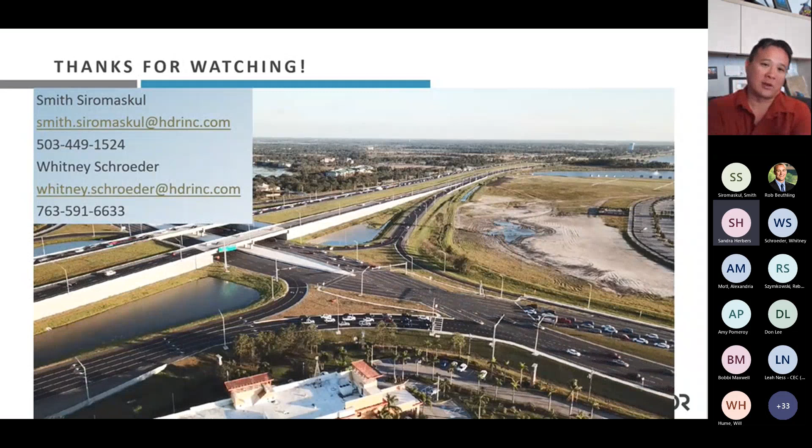So in Vissim, what we typically do is we will go ahead, model the DDI, model the adjacent intersections, put everything in there. We'll run the analysis on that, even though we have that overcapacity intersection in that model. Then we will run a second iteration where we turn those signals off at the adjacent intersections and simply let the volume flow through to emulate how much traffic actually wants to come in, to make sure that we're not undersizing the interchange for what might be there. So hopefully that answered your question.

Are there any other questions? Oh, this was going to be my question. Have we ever done this in Vistro?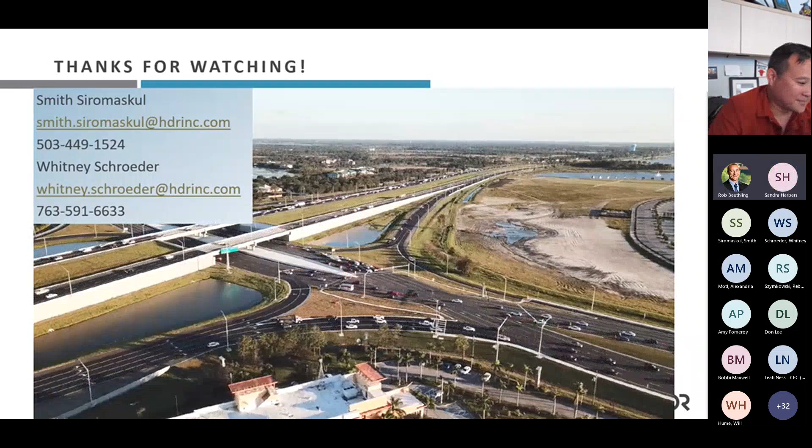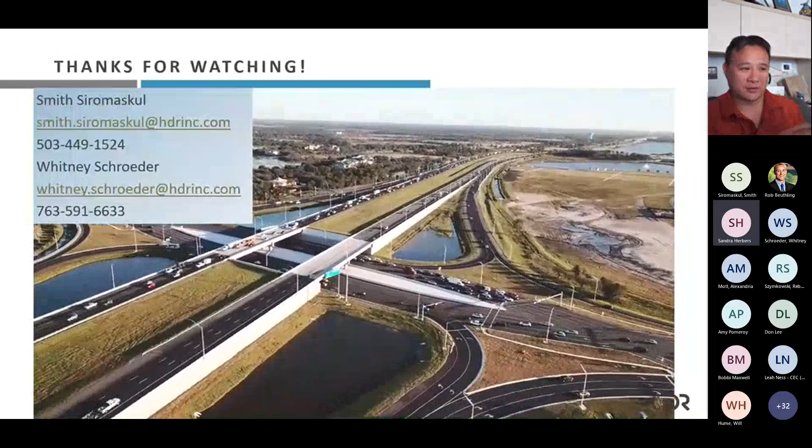I like using Vistro from the perspective that it gives you much better control. Basically, Vistro has an RBC built into it, not the simplified RBC you see in Synchro, but one that

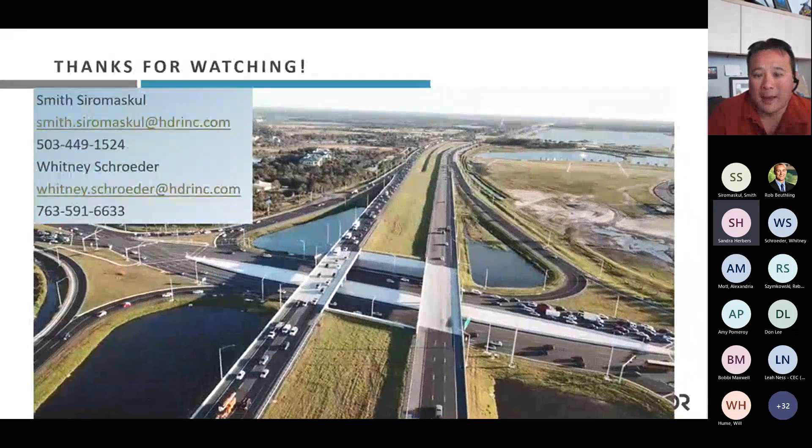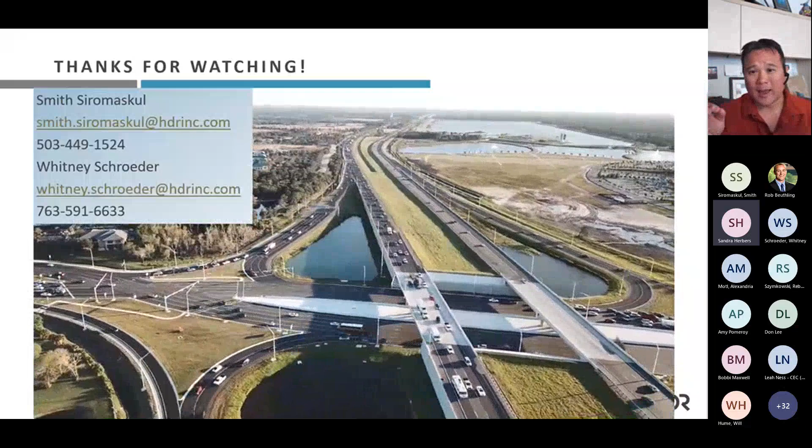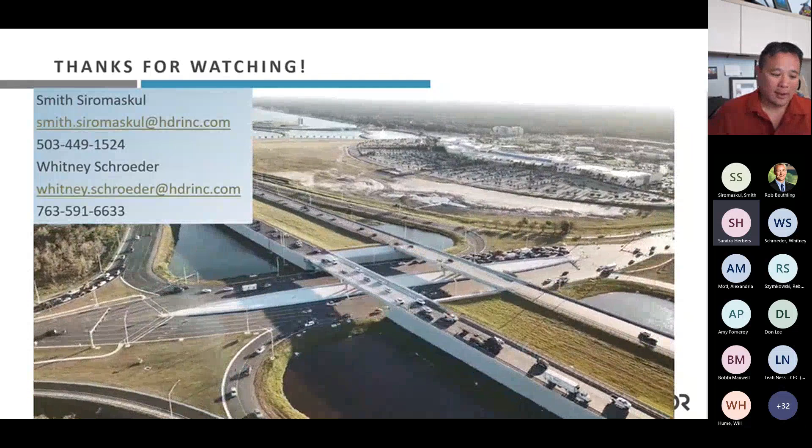can actually handle the delay in trail green because it basically emulates the RBC controller that's in Vissim. Have I done it in Vistro? Yes, but I'll go back to the fact that when you're looking at something deterministic like Vistro, HCM, Sidra, or Synchro, you don't adequately get the sense of how progression will work between the two signals and along the corridor. I can't stress enough how important progression and platooning are to the function of a DDI in real life.

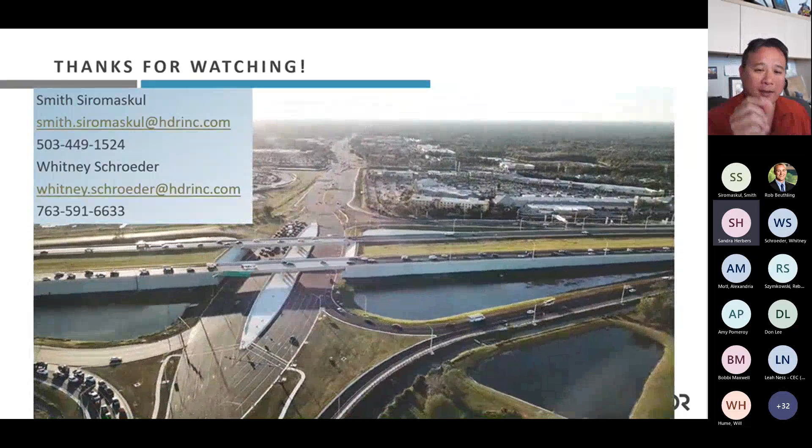For example, right here on the screen, the way it's turning right now, that intersection in the background is Cattleman Road. For whatever reason, the drone happened to catch it looking completely empty, but that's a 4,000 foot long triple left turn lane. And that intersection in real life today has failed to the point where it backs up and spills back into the DDI.

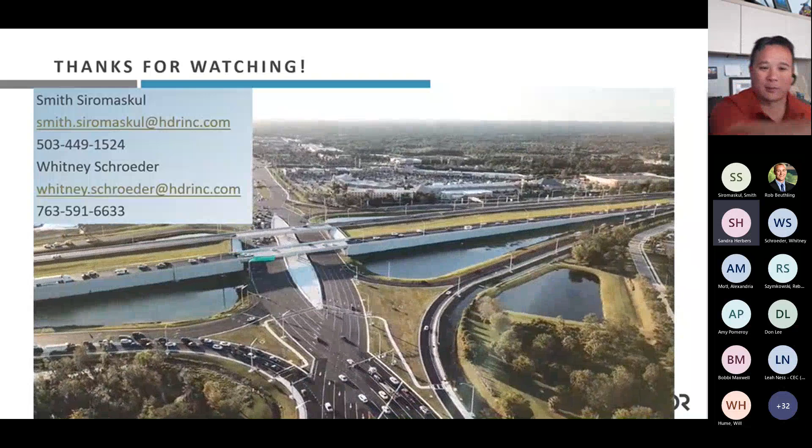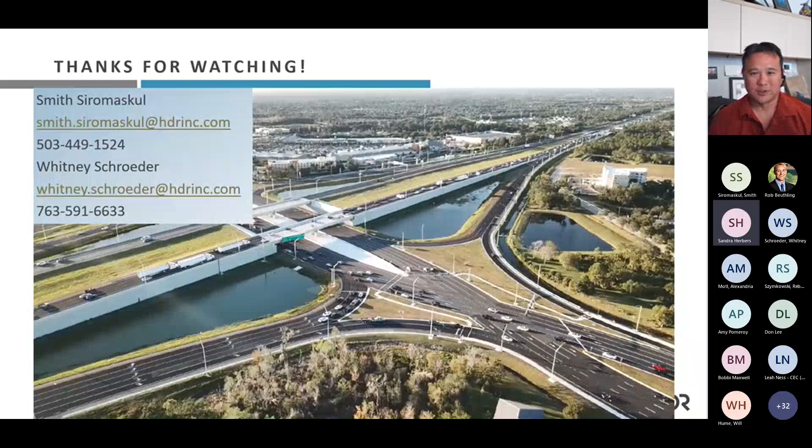What it does is affect how the DDI releases westbound traffic, because westbound traffic will release differently if it sees an empty road in front of it versus if it sees a back of queue just 1,000 feet downstream. That's something Vistro, Synchro, and HCM really can't account for. So yes, I've done it in Vistro, but it still has the same shortcomings, just not the one with delay and trail green.

All right, Sandra, you have your hand up.

Yes, thank you. I have a question, kind of hoping you can re-articulate a bit more on the analysis of different alternatives. For the I-41 project in Appleton, when we worked on that project, we went through a series of analysis using Synchro and Cap-X and other things to look at conflicting flow analysis to make our determination. Because it came from the thought process that we didn't really have the time or data to analyze all of them, I think there were 5 different alternatives for a large corridor. So I'm hoping for a bit more discussion on narrowing down analysis options before bringing it into Vissim, or more information on that.

Well, I can tell you that Cap-X is a good tool to help you develop a short list. I'd be very careful about both Cap-X and the ICE processes I've seen out there in different states thus far, because sometimes it oversimplifies things.

For example, if you start looking at hybrid type intersections or interchanges, where you're borrowing an element from a displaced left and marrying it with a DDI, it simply can't handle some of those more specialized items. What we traditionally do when attacking an intersection is that same kind of hyper simplified conflicting flow analysis, and we'll do it in either Synchro or Vistro.

At the same time, we'll throw that same signal into that same kind of plus type intersection and put in a single point. Will we map out the whole single point? No, you really don't need to. In Synchro, if you want to fake a single point, make a plus type intersection and just jack up your yellow and all-red times, and you'll get a sense of whether or not a single point will function.

But when you're starting to look at that, I'm not discarding Synchro, HCS, CAP-X, or whatever from a fatal flaw perspective.

But once you've gotten to the point where, hey, these are viable and these are worth looking at, I would absolutely push at least 2 of those options into something like Vissim, because you're going to want to be able to make that comparison on a more granular level. And if you're comparing options that have different numbers of signals, or that some movements are free flow in one option and not in the other, you really need to be looking at simulation to do that. But there's no reason you shouldn't be down to 2 or 3 options by the time you get there.

Awesome, thank you so much. I did have a follow-up question. I don't know if Rebecca or Vicky or anyone would have this answer, regarding the signal timings of the DDIs. I know traditional diamonds, we're in Wisconsin using that 4-phase TTI phasing. I don't know if we're looking to continue using a similar methodology within the DDIs. Just noticing on the simulations that were shown in the videos, those were stopping people under the bridges. And so are we looking to not do that as well? Because that would change our analysis as well, I would think.

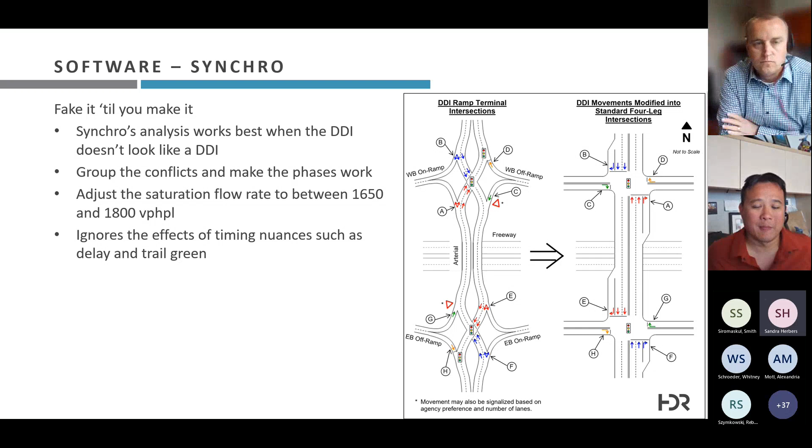That depends largely on your interchange. And what I'll say is there isn't as simple an answer as you would hope. There is an interchange that I worked on, I-75 in Wesley Chapel. It's just outside of Tampa, where the flow rate for this movement and this movement were so high, and the eastbound through is actually so low that we ran the DDI as a 3-phase signal. So on this side, you had a phase for this movement where these two are running together.

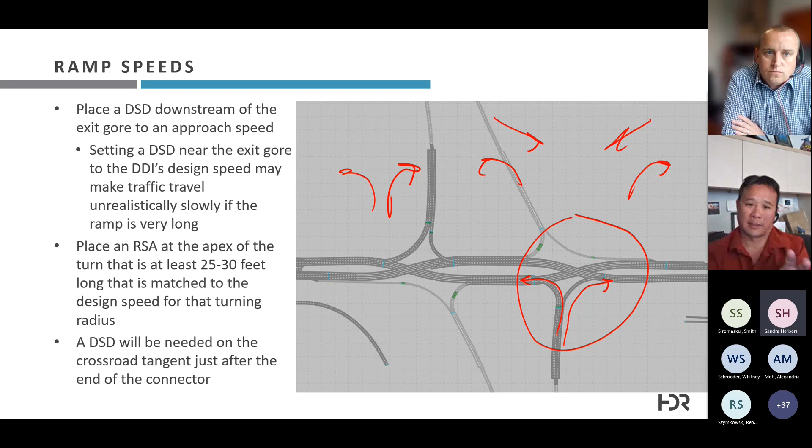You had a phase for this movement where these two are running together. And then you actually had a third phase, and I ran out of space because I didn't plan very well. But we actually had a third phase that was strictly just the ramp discharging, because that ramp was handling something like 4,000 vehicles per hour in the PM peak. And in that case, what we were really progressing, we were progressing this movement into this movement.

So I know a lot of the standard diamond templates that are out there are trying to facilitate flushing the core of the interchange. So you're trying as hard as possible to empty the space in between the two terminals. What I'll tell you for a DDI is, no matter what this signal is doing, somebody is always entering the core, always, because it's a two-phase signal. Either the northbound left is coming into the core or the westbound through is entering the core. So the idea of trying to empty the middle of the interchange at a DDI isn't as practical, and it's not necessarily something that's required.

You just have to make sure that when you're releasing one flow, that the back of the flow in front of it is already moving, if that makes sense. So everything on the DDI is going to be very site specific, even down to the phasing, the sequencing, the timing, everything. That's what makes it fun.

Yeah, this is Rebecca. I guess just to add to that, and Smith, maybe the background helps: traditionally in Wisconsin, we've always tried to clear out that core. I realize the DDI has some uniqueness to it. I think it's actually a good discussion, probably with our signal engineers, to determine what kind of expectations we have. Should we have expectations that we try to clear them out as much as possible? Or that they need to clear both intersections and both crossovers in one fell swoop or not. I can't answer that, Sandra, but I think it's a valid question that we may want to talk about within DOT. Sounds good. Thank you both.